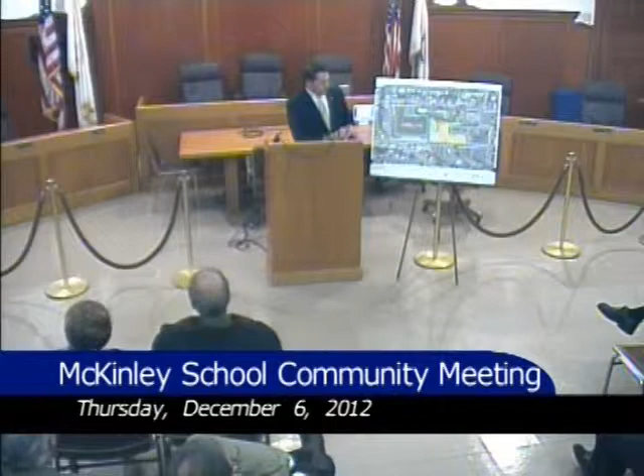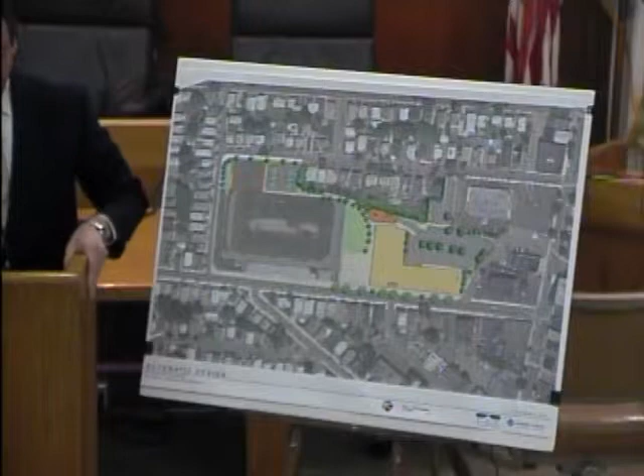The building as it's planned right now — when we started looking at this, we looked at it up to the wall of the existing track stadium complex, saying that would be the site for the new school. But as we started looking at the Hill Park site, the city, the building committee, Mayor Rizzo, and Superintendent Dakin urged us to keep sight of this issue about the football field.

And we continued to look at the high school site for a potential location for the stadium. We started looking to see if we could possibly allow enough room for the new stadium so that when renovations happen to Del Russo Stadium, we could elongate it to get a full regulation track around, which is going to fit right into this spot.

So when we started planning, we had up to this line, but we realized there was real value in allowing that area to stay reserved so the stadium could occupy it in the future — or hopefully even sooner, when Del Russo Stadium is redeveloped. So it's feasible, and it doesn't restrict us too much. We can stay on 3 stories.

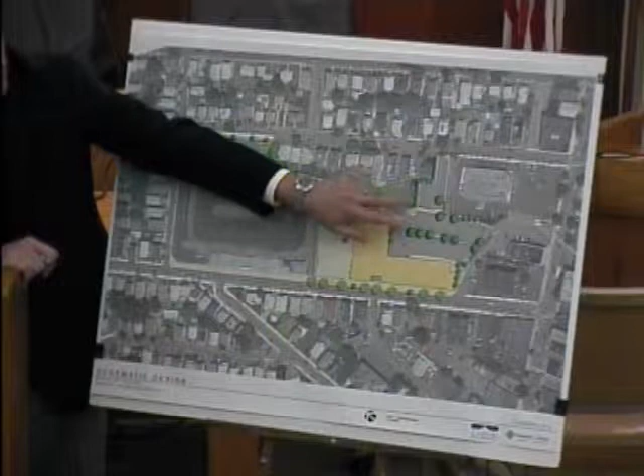This is the 3-story structure. It's based on, as you can see, an L scheme. There are major entrances into the building at this point, as well as at this point on Park Avenue. There's about 60 parking spaces on the site proper, and about another 15 spaces in this area back here, which I'll talk about in just a second.

As you know, there are existing tennis courts and basketball courts currently in this location. This proposal suggests that ultimately, when the whole complex is built out, the area back here in the northwest corner of the site would become the home of the new basketball and tennis courts, which could also serve as a future hard surface playscape for the kids from the school.

There's also a playground, a tot lot here at the north side of the building, with play structures appropriate for pre-kindergarten, kindergarten, and first grade children. Until the stadium is built out, this area will serve as both a hard surface playscape and a grassy area, which will be a nice, suitable playground for the children.

The older kids can possibly go back and use the courts. Once this field is built out, the recreational resources on the site will rely on the tot lot, this hard surface play area, and there will be a small plaza just to the west side of the building along this edge.

The circulation in and out of the — well, let me talk about this a little bit. This plan does assume some additional property acquisitions adjacent to the site. As I mentioned before, the original site that we planned on went up to the existing wall of the stadium. By allowing that area to remain undeveloped, with either building or parking,

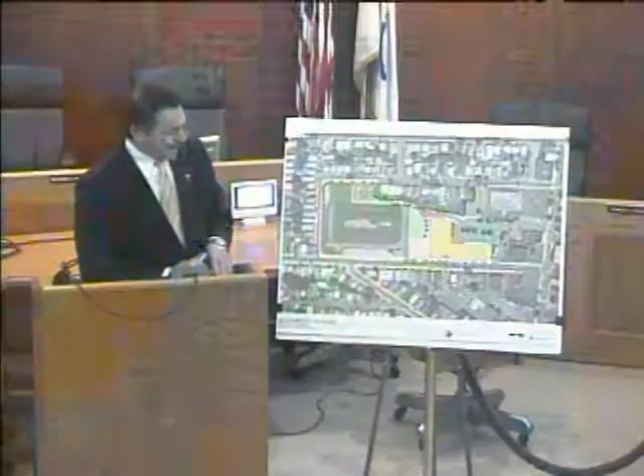it chokes us a little bit in regards to the parking that's available on the site. It doesn't get us to the number of parking spaces we would need to accommodate all of the faculty and visitors we would have on a daily basis. And it also restricts the amount of traffic flow on the site, making it very dense for drop-off and pickup times.

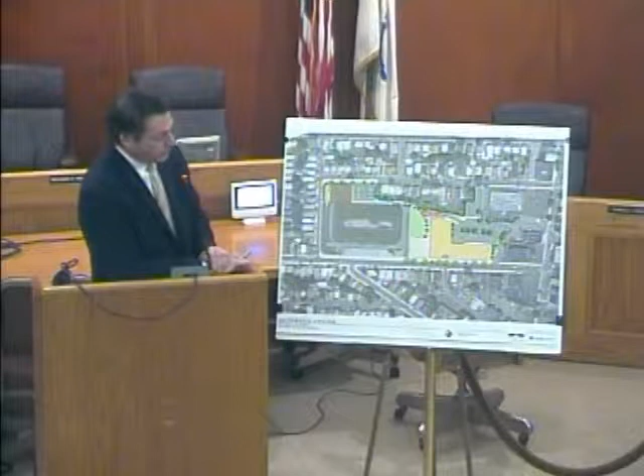If we don't acquire some additional property back there for driveway space, drop-off edge, and parking, the net result is going to be more overflow onto Park Avenue and onto Fernwood. So when we looked at that, we felt this was something we wanted to put forth to the city as an option.

It would require the acquisition of 3 properties along Fernwood Place. It would allow for that street to be opened up wider so it could become a 2-way street, providing both ingress and egress from the site, and also that very critical additional parking space and drop-off edge that we need.

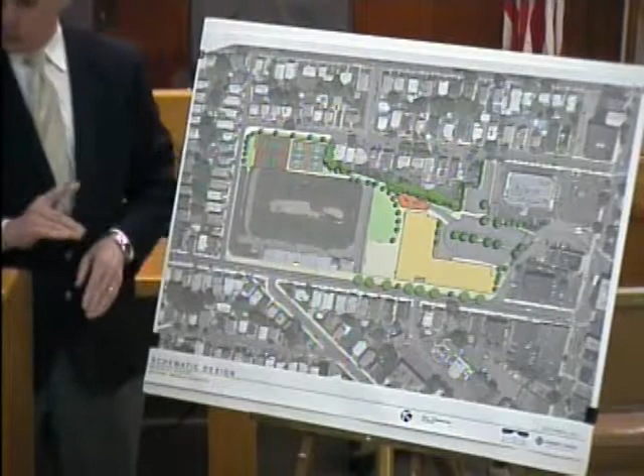So the traffic patterns primarily on the site are like this. From Fernwood Place, our primary access - most of the students, and maybe Dr. Dakin can help me out with this, most are from the south area, south of the building.

So most people are coming north to get to the site. The primary access is up Broadway, up Fernwood, into the site. That's one. Secondly, up Broadway, up Park, into the site. And a third that will probably emerge, not necessarily our plan, but something that's probably going to happen - people coming down Foster, turning left onto Park and dropping off along this edge, probably overlapping the stadium a little bit.

Now those kids will walk along this sidewalk, which is very wide, and there's a major entrance into this building. There's a lot we'll have to continue to discuss in terms of traffic safety - where to put patrolmen, crossing guards, crosswalks. But we see this as a major junction and a major drop-off edge here.

Which helps with reducing the amount of cars coming onto the site. So regarding these 2 traffic patterns, if you come in here from Fernwood, you can drop off right here, turn around, come right back out to Fernwood - we would propose to make this a 2-way up to this point. So when you discharge from the site, you can either go back toward Broadway or left onto Fernwood.

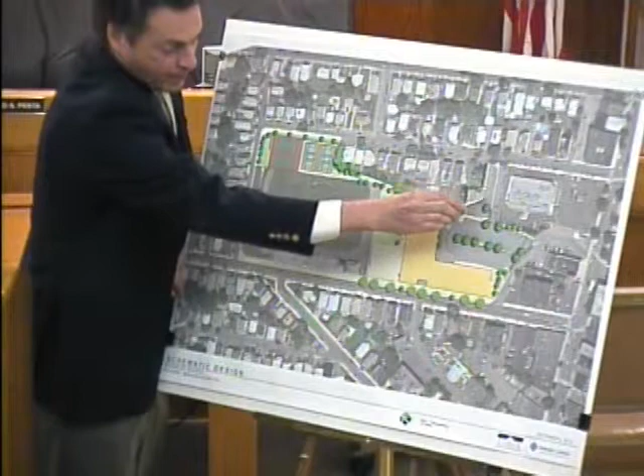You could also come in this way, loop around the island. All of this here is drop-off edge, but say you have a pre-kindergarten student you want to hand right off to the principal - you would come right around to the front, drop off right along this edge, then come through the site.

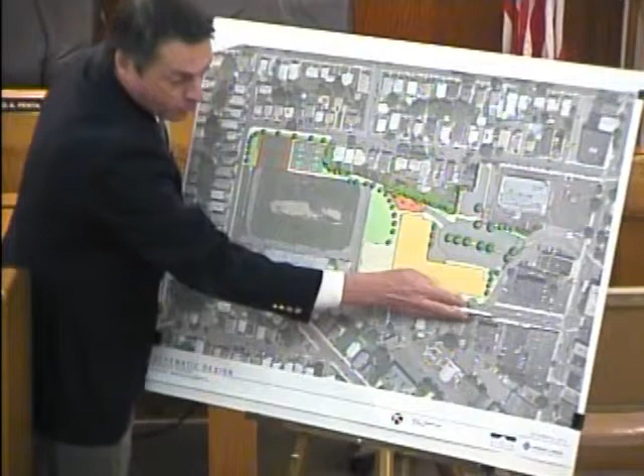You can either come out to Park - it'll be right turn only onto Park because this queues up quite a bit in the morning here, discharging onto Broadway - or you can loop around here and come back out Fernwood. So that'll be the primary traffic patterns from Fernwood.

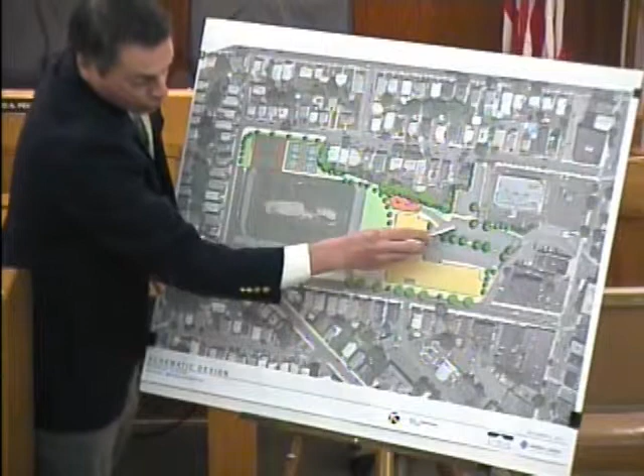And from Park, if you come onto the site from Park, you would most likely come right around the loop, engage with the main drop-off plaza right here, come back out, and you can either come out Park or come back out Fernwood.

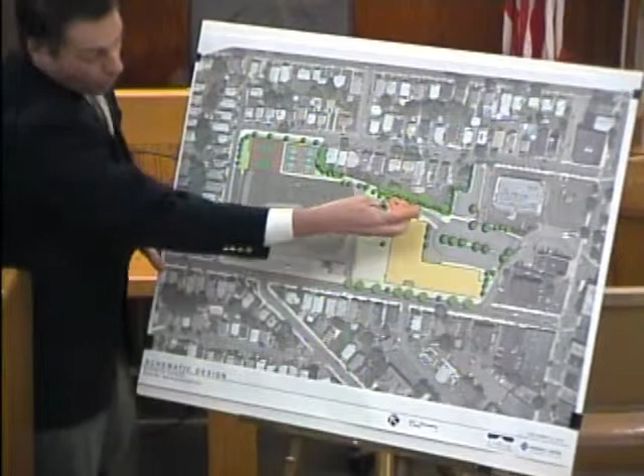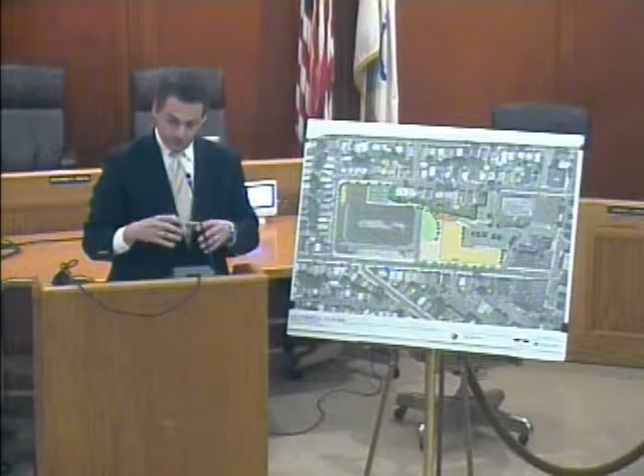As I mentioned, all the kids being dropped off will come right along this plaza area, into the main plaza and main entrance. There's also a main entrance here from Park. They all come into a common lobby where the administration office is, and I'll show you that on the plan in just a minute. So there's very good supervision and surveillance of both entry points into the building from that one vantage point of the office.

The only other thing I wanted to point out on the site plan was that this back here is the service area, where we'll be receiving shipments. The dumpster will be back there. There'll be a generator and a transformer, all of which will be screened. We'll put some sort of an acoustical enclosure around the generator.

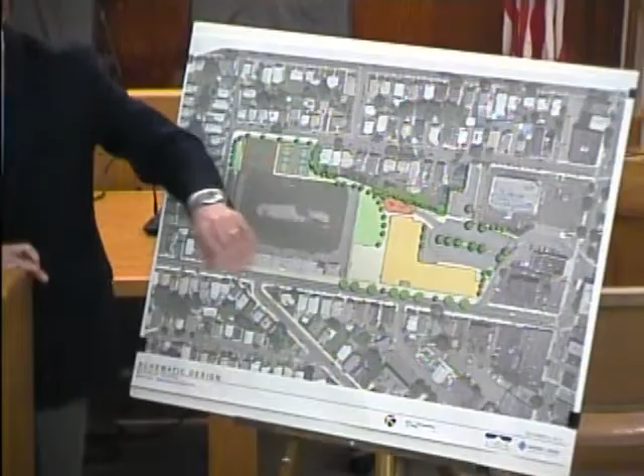Did I cover everything on the site plan? I'd like to come back with any questions or comments on the site plan. I'd like to see if we could advance to the floor plans.

I'm just going to run through them real quick. I won't get into the detail of where all the IDF closets are and the mop sinks and all that, but just give you a general idea how the building's organized. We think it's working pretty well.

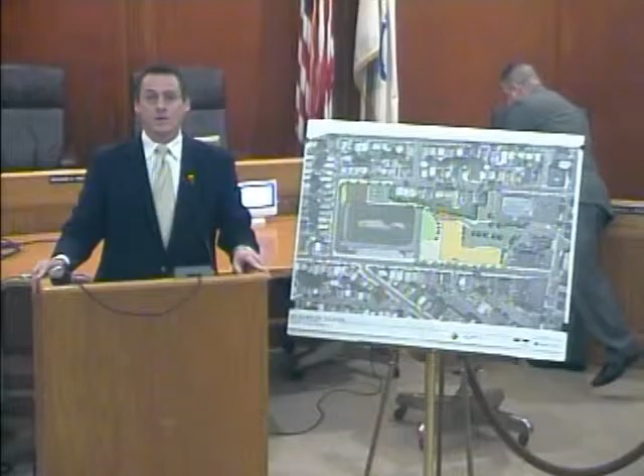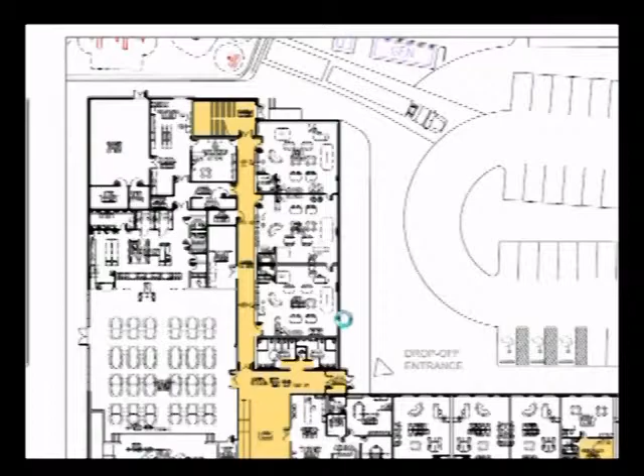And just pan up a little bit on that, Jim, if you can. So if you enter in at the main entrance there, you come into a very generous lobby with the administration area on your left-hand side. That's the second floor.

Okay, so here we are back at the first floor. So when you enter in at the main lobby, the larger yellow area in the center of the plan, straight ahead of you is the cafeteria. There's lots of glass looking into the cafeteria, looking out into the fields.

Basically organized around the cafeteria to the north, we have our shipping and receiving area, boiler room. To the right-hand side of that north wing are the 3 pre-kindergarten classrooms. Very nice location for those. They're right next to the drop-off area. We could possibly have doors that open right into those so that the teacher could actually go out and engage with the parents as they're dropping off the children.

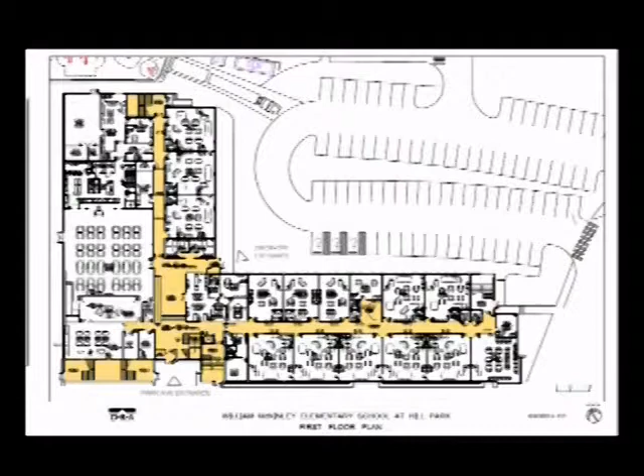The administration area is right in the center of that plan, adjacent to the lobby and adjacent to both entrances from the interior of the site and Park Avenue. And then the whole wing to the right there on the plan are all of our kindergarten and first grade classrooms on the first floor. There's major stair towers at either end of that, and there's also a major stair tower to the bottom left-hand corner of the plan, which is the main discharge from the gymnasium, which is on the second floor.

Let's advance to the second floor plan, Jim. The gymnasium, this is kind of a key component of our strategy for this site, is to reduce the building footprint on the site. We wanted to stack as much of the program area as we could, and what we did is we found a way that we could put the gymnasium over the cafeteria. It's a little bit of an unorthodox strategy.

We did it at West Revere. It worked great over there. The minor problem with this, but it's not insurmountable, is that you've got to allow for a lot of people in that gymnasium to find a way down to the ground in the event of an emergency, and that's why we introduced that large stair directly to the bottom left-hand corner of the gymnasium.

It's intended that both the gym and the cafeteria on the first and second floors have a lot of glass in them so that from the lobby space and from the corridors you can see into those spaces as well as see out into what hopefully will be the new Della Russo Stadium. Give a little bit of soft greenscape to an otherwise urban setting.

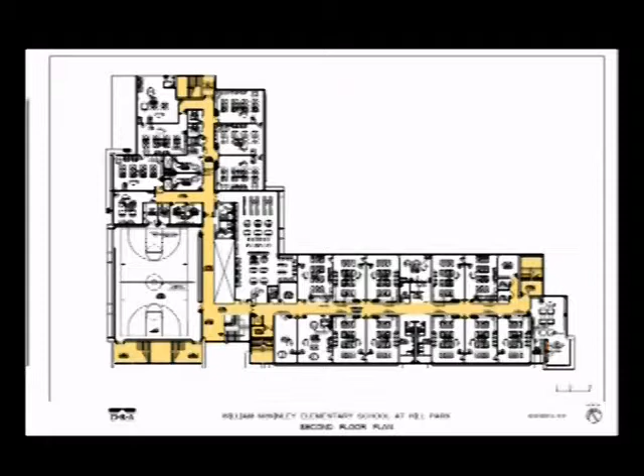Again, most of the other spaces, the only other non-classroom space on the second floor, if you look just to the right-hand side of the gymnasium, on that inside corner in the plan, is the media center library. Again, a lot of glass, very transparent, very open, has a very prominent position in the plan. As you come into the building, into the main entrance, you're looking up through the glass into the library, nice fixtures, kids sitting in soft seating, much like the strategy we employed at the Rumney Marsh Academy.

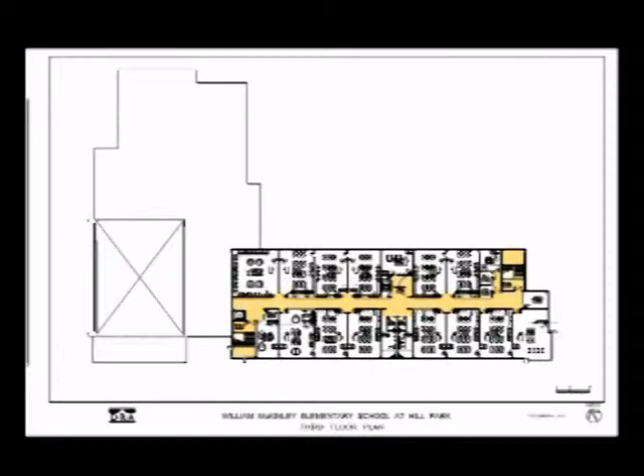Let's just go to the third floor, Jim. So this stacks neatly on the first and second floor. On the third floor, just classrooms. The gymnasium volume, of course, goes all the way up. We can probably go right on to the building elevations.

So this elevation is kind of a two-piece elevation. The one on the bottom connects to the one on the top. And the materials are basically masonry, terracotta, which is a clay masonry type of product that's a rain screen. There's lots of windows and lots of glass around the entry.

So there's a very different feeling between the classroom wing, which has sort of ribbon windows, and the terracotta, to the gymnasium volume, which you see on the bottom left, as well as the entry into the building. Very transparent, a lot of curtain wall, a lot of glass. We'll use sun shading devices and interior light shelves to cut down some of the glare. We'll specify a particular glass that reduces the amount of solar gain that we have through that exposure.

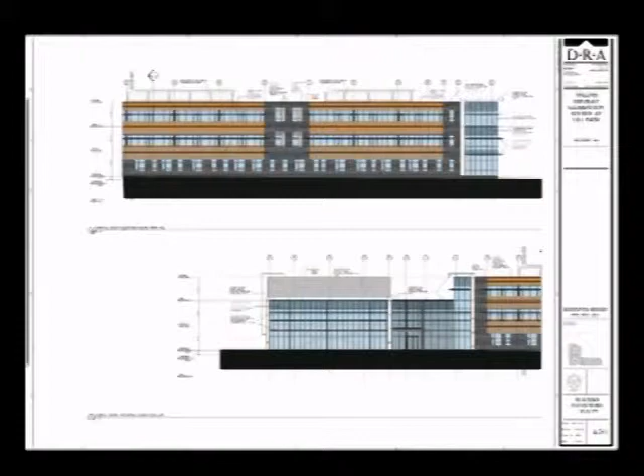We can control those things now with some material strategies. But this openness of these areas is going to do wonderful things for creating terrific monumental spaces, having a real connection between the interior and exterior of the building. Let's go to the next one, Jim.

And this would be the elevation. The one on the top is the elevation looking from the driveway in from Park Avenue. So you see the classroom wing on the left-hand side, and then beyond you see the north wing of the L, as well as the library projection.

Jim, can you use your cursor to point to where the library volume is? That area right there is where the library is. So as I mentioned before, when you're walking into the building, you're looking up and the library is right there over your head. A lot of glass - you can connect right in with the light fixtures and the kids sitting up there. It'll be very dynamic and engaging.

And then the bottom elevation is what you would see from Della Russo Stadium. As we pointed out before, on the bottom you see the glass going into the cafeteria. On the top, surrounded by that white surround of some material, there would be the glass curtain wall of the gymnasium.

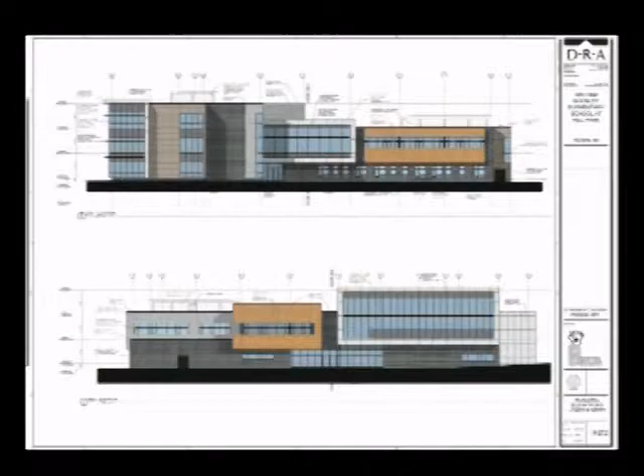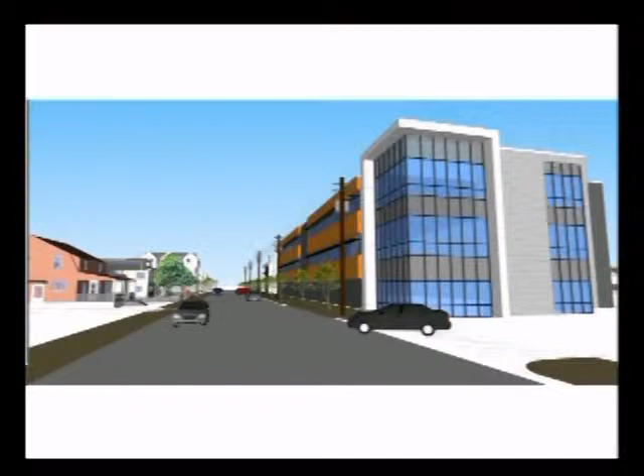What else is in those spaces, Jim? There's an art room on one floor, a computer lab. And then once you pass those specialty spaces, it transitions to a different type of vocabulary with the masonry and the terracotta. Do we have another view there, Jim?

So this one is looking from the - is this the opposite way, Jim? Okay.

So this is what we were describing - one of the major drop-off edges is from this point and back toward the picture plane where kids could be dropped off. They could walk past the gymnasium, the glass of the gymnasium stair, and into that main entrance just beyond the phone pole. That will be probably an equal main entrance to the one on the interior part of the site.

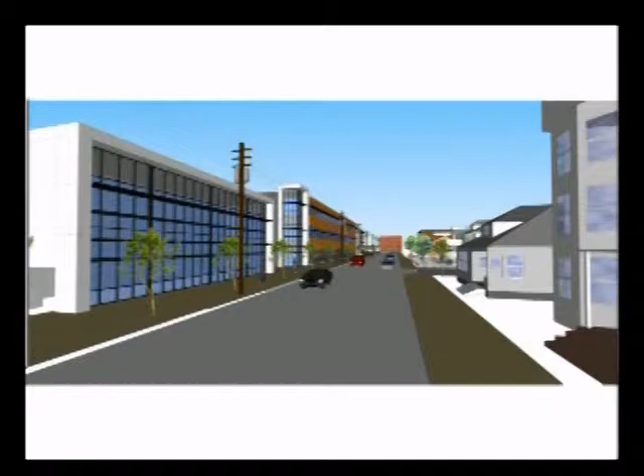And that shows that entry volume again from a slightly more eastern view.

Picture with the McKinley, existing McKinley school in the foreground and the new school in the background. You probably won't see that view very much, but if you're going by on a hang glider, you know, take a shot.

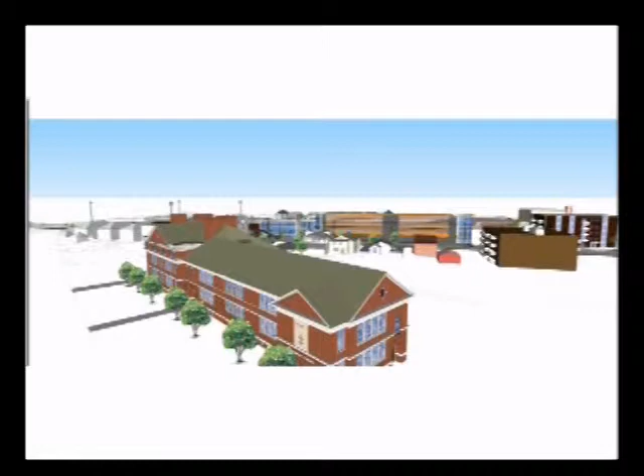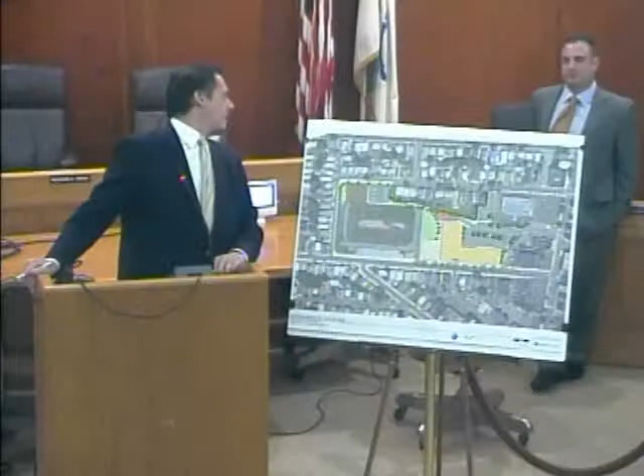So that is kind of an overview. Does anyone think there's anything I've skipped over that we want to touch upon?

The real idea behind these community workshops, or community presentations, is to try to get some input. We're at schematic design. We've established what we think are the best ground rules for going forward with the project, but we've got some of our experts here.

Christine Ketchis from Nitsch Engineering - she's our engineer, our traffic engineer. Doug Morris from Warner Larson - he's our site designer and also very savvy about all of the civil engineering aspects. I've been working with Doug. Doug worked on the West Revere School, the Paul Revere School, and on Rumney Marsh.

Yeah, so we're certainly pretty well equipped to answer any of your questions and hopefully settle any concerns you have in regards to the project. But we're also very interested in hearing input and ways that you think we might be able to make this project better.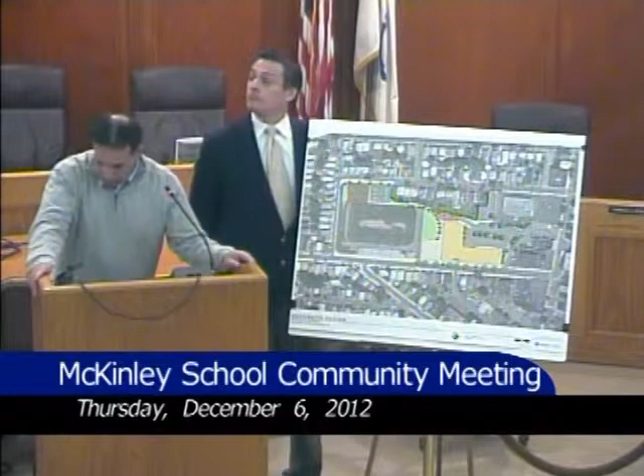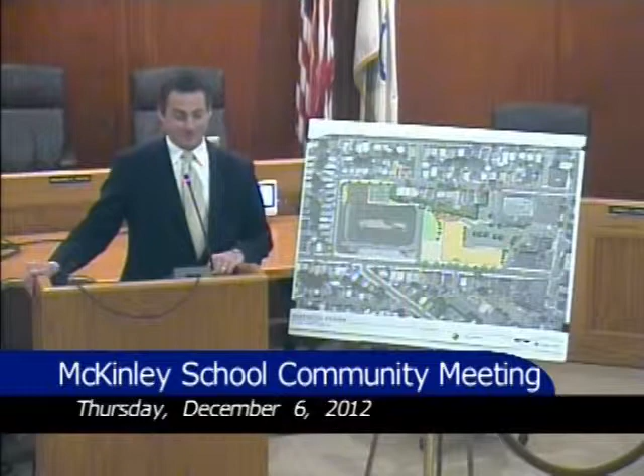Oh, I'm sorry, yeah. I have several. Sure, you mind if I come up? Absolutely.

I'm Councilor Charlie Patch, Ward 6 Councilor.

It's hard, I feel there are questions that have to be asked, and it's hard for me to. I feel that I have to do it, and I have agreed with Superintendent Dakin and Mayor Rizzo on just about everything going on with the school for my 5 years as a councilor. But I've had problems with this right from the start. On August 7th they had a meeting to vote on which option to use.

They gave a sheet out with several options, and I didn't feel at the time — I was the only one that spoke out against the Hill Park site being the option chosen. I grew up in that area. My mother's side, my Sicilian family, immigrated from Sicily and lived on Alston Street, and my Irish grandmother — we grew up as a family on Victoria Street and lived in this area. So it means a lot to me, even though for 40 years I've been living in Ward 6.

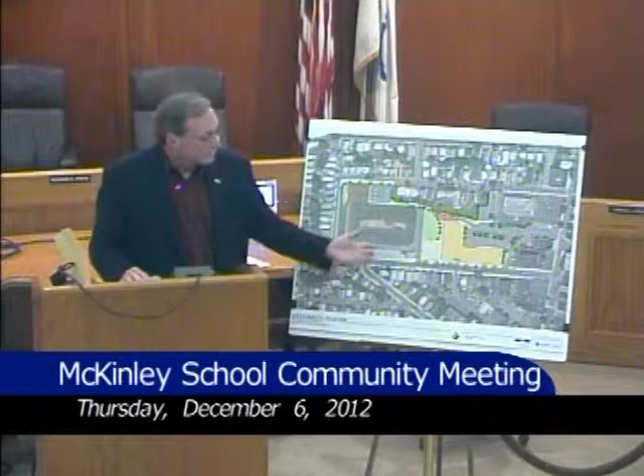We, as a councilor, have to pay the bill. We have to vote on the bill, and I just don't... we don't get no figures. All of a sudden now, they never had at the meeting on August 7th. They had no money to take land. They're talking about taking 3 or 4 houses.

What about in my ward that I represent, St. Mary's Park? They're talking about putting Hill Park down there. It's a swampy land, if anybody's been down there. And they're going to rearrange the ballparks, and how much money is that going to cost? And they're talking about now, the reason they're not building it on the old site is it's going to be an administrative building. Where's that money going to come to refurnish that?

I mean, there's a lot of questions, but we're not getting any answers as far as money. So I don't know how it got to this point where this site's already been picked. When the ballpark, and back at St. Mary's, we don't even own that property.

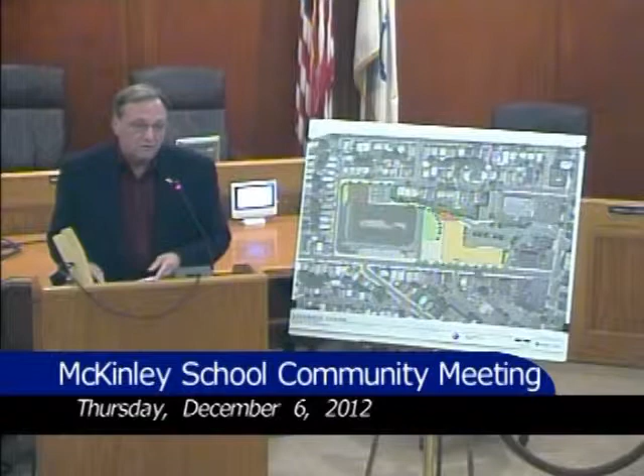Again, there's a lot of questions, but I'm going to support the parents and the kids of the McKinley school. I know you need a school, but I want some answers. I'm going to be the one up there, sitting up there, having to vote to pay the bill. Your money. It's going to be your money. So hopefully, over the next few months, we can get some answers.

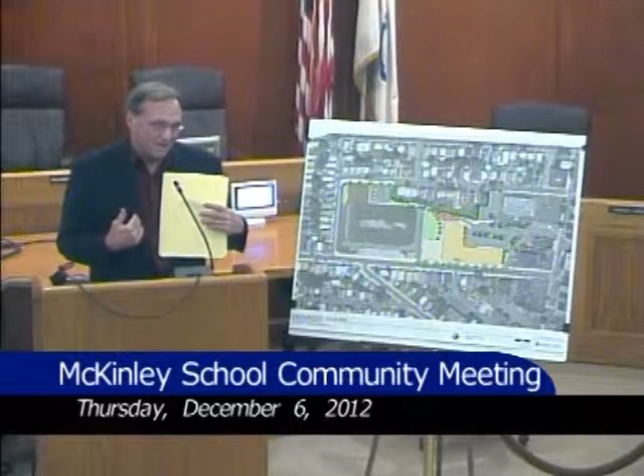And what, I don't know where the young lady is that did the traffic plan, but you have to live here to really know what a nightmare that area is as far as traffic without a school. And it just ain't going to work. But hopefully, if it does develop, maybe I'll be proven wrong. But at least I had my say, and hopefully we can get something worked out here. Thank you.

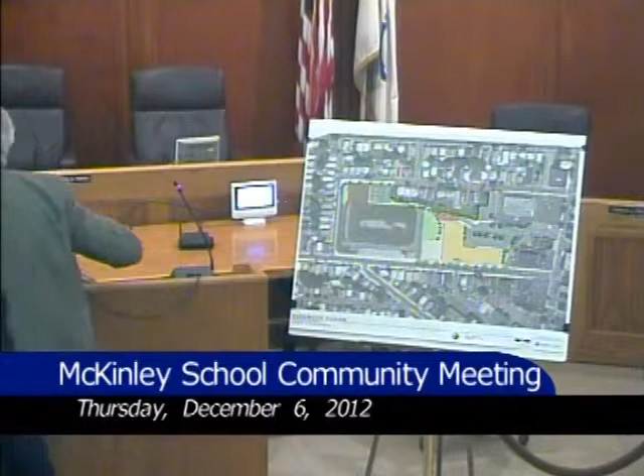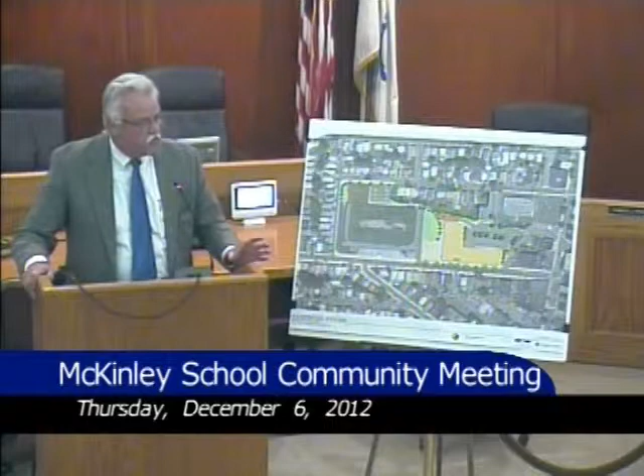I got a couple of comments for him. First of all, I want everybody to understand something. This is not an ideal situation. It never would be, never could be. By the way, I'm Ward 4 City Councilor Steve Reardon. We were up against significant roadblocks finding a site for this school. I would remind Councilor Patch that it came down to 5 separate options, 3 of which were the actual McKinley site.

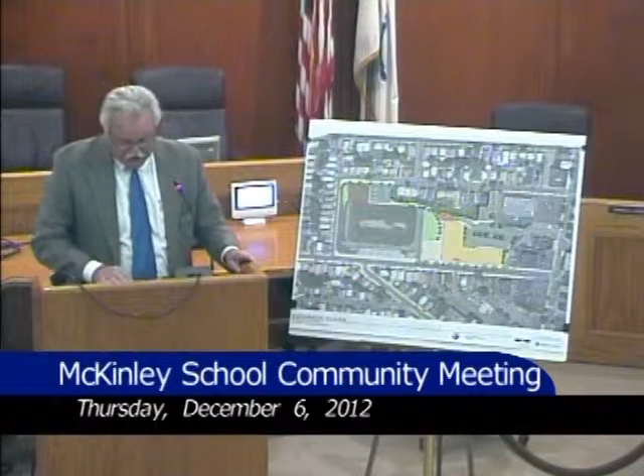He's talking about no figures. Well, frankly, we have figures, and the figures have been published and known to everybody. Option A was rebuilding the school. Let's start with option B: renovation and addition of the school as it stands. That option was determined to cost about $43.1 million with an estimated share of Revere of $11.6 million. Now, no one knows what it's going to cost dollar for dollar, but these estimates have been there since at least this summer.

New construction on the existing McKinley site, in addition to being a huge issue with finding space and disrupting the entire school system, the figures are there. Option C was $40.9 million with an estimated Revere share of $11.9 million. That is the estimate. It's not a number we can put our fingers on absolutely, but it's a good faith estimate that these people, who have worked well over a year now into this system, have come up with.

Option D, $45.6 million, Revere share $14.3 million. These are the estimated costs. The new McKinley School has an estimated cost of $41.7 million with Revere share at $9.6 million. This is what Dr. Dakin was referring to at the beginning. These figures have been developed. We don't know specifically what it's going to cost, and we won't until the final bill is in.

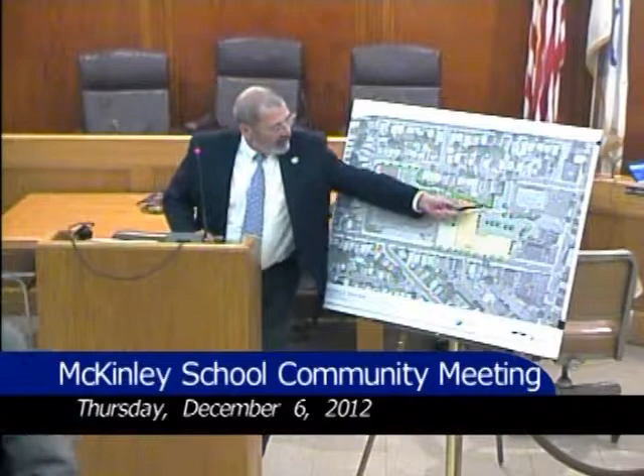These properties are the properties that are in the area. It's better for us to walk the kids, no problem with the traffic. I live across the street as well, so.

What is the problem? Well, to address the issue of the folks that are here, you're in the properties that we're proposing to take because it's understood how difficult it would be on you, and add to that, it makes the project happening better. So in essence, in my opinion, it's a win-win.

You don't want to live next to a school, even if it was a one-way in, which we would have to do. I think the chief would mandate we have to come through. There's no way on God's green earth people could get out. Mario and his wife could not get out of their house. No, there could not be two ways. It could not be two ways.

But understand, the plan we're presenting is in harmony with what you're thinking. We take the houses. I mean, unfortunately, you know how I feel—I wasn't even answered when I walked to my own councilman. I had to show up at your door to get any kind of an answer. And I gave you as best I could.

And what we will do—because it's beyond the jurisdiction of me as superintendent or me as chair of the building committee to talk about the purchasing of the lands—what I will do is make sure and talk to the mayor that he gets a meeting with you folks specifically about the property acquisition suggestion. And that will give you an audience with the person that can answer that question for you, because I can't answer it. It's not in my purview as building chair to answer it. But I promise you I'll get you access to those answers, okay?

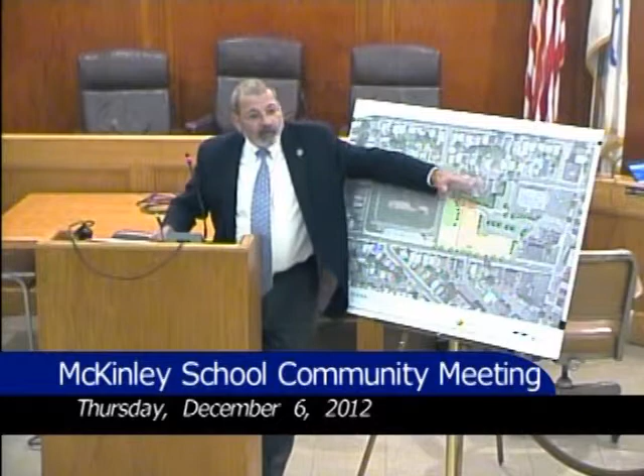No, I think the intention of the councilor was that if this plan all came into being, namely with the taking of those three properties there on Fernwood Place, that it would enhance the others. I think that was the intention of his comment. I can't speak for him, but I think that was the intention.

Well, because this is exactly what that forum is for, and the communication out—again, the building committee can only make recommendations. It's up to the city whether they want to go down that route. So we've been pushing, I've been mentioning Fernwood Place and Fernwood Ave for a long time, but without the jurisdiction to make those decisions, any conversation that I would have would have been out of my authority as building chair. But I will promise you I'll get that audience.

If I can go back to Mr. Patch, the bottom line is $4 million. If the estimates had a $42 million building and the others were 46 and 52, and it ends up being that the building is 44, the other one would have been 48 and 54. So there's about a $4 million swing, and as time goes on, that building cost naturally gets inflated and goes up. I wouldn't be surprised if it goes up. But if it goes up for the cost of building it on Hill Park, it would have gone up for the cost of building it on the existing site proportionately, or the other site.

So we took with best knowledge what we knew as the cheapest possible plan. Yes, traffic is brutal. Yes, traffic will be brutal. And I would suggest that if we ever could have put it on the McKinley, although we can't because it's more money, that the intersection in front of City Hall would have been brutal. So brutal is there when we're going to move 690 kids into the school rather than, how many do you have now, Mr. Mosher? 470.

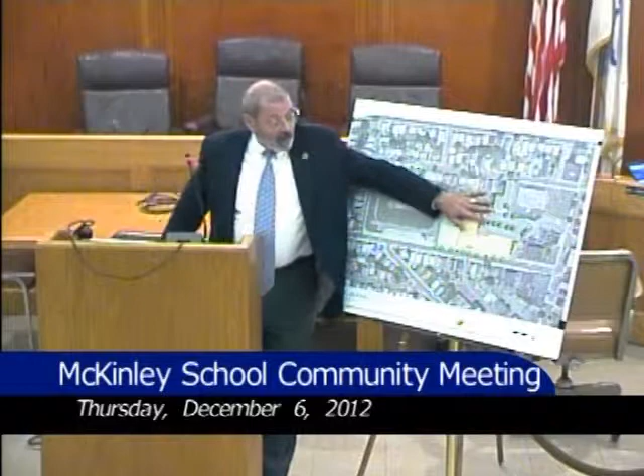The strategy here runs deep, and the thought runs deep. I understand your point, and we'll try to get to that. But why don't we see if there's anyone else? Question on any other point or comment?

Councilor: On the traffic study, I'd like a copy of it. Was it done in consultation with Revere Police or with our traffic division? We'll let the traffic people answer that.

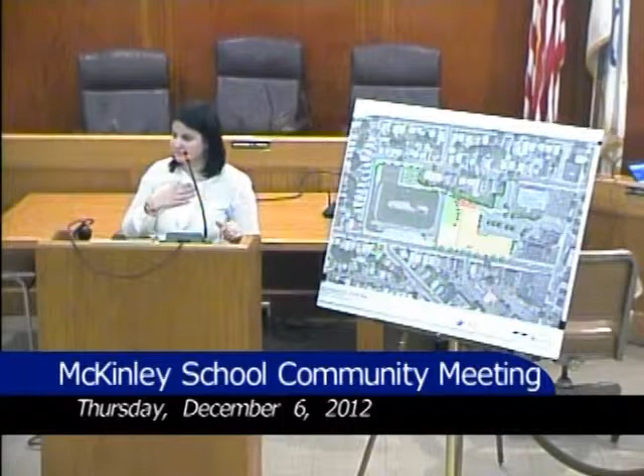Hi, Christine Ketches with Nitsch Engineering. I did the traffic study. I did meet with the police department, I believe with the safety officer, and had about a half-hour discussion with him about his thoughts on the school. He said it absolutely is a traffic issue. His big suggestion was to turn Foster or Yeamans into a one-way in the other direction to alleviate that congestion. This also touches on the point about Broadway.

I don't live in Revere, and I've been told by many people that if I did, I'd truly understand. But I have driven through here in rush hour a few times on my trips to the site, and it is a mess. I think one of our goals by doing the one-way out onto Park and trying to get most people to enter the site from Fernwood is to alleviate those left-hand turns you'd normally anticipate at Park. So we're trying to do everything we can to get it off of Broadway and off those pinch points on Broadway to kind of disperse everything.

Another question I have is on MBTA buses. I know that left turn onto Park - has there been any thought of working with the MBTA to figure out a way around that? Because even now, with a very newly popular restaurant on the corner, seeing buses take that left turn gets a little hairy. I've seen them make that left-hand turn. We have 700 kids coming out of school, and you have a bus taking that left turn.

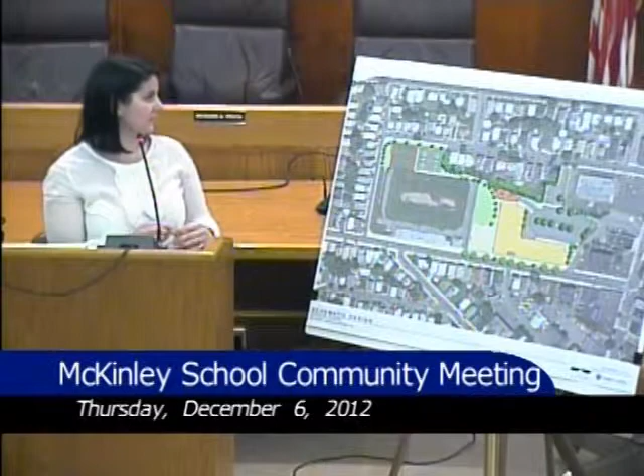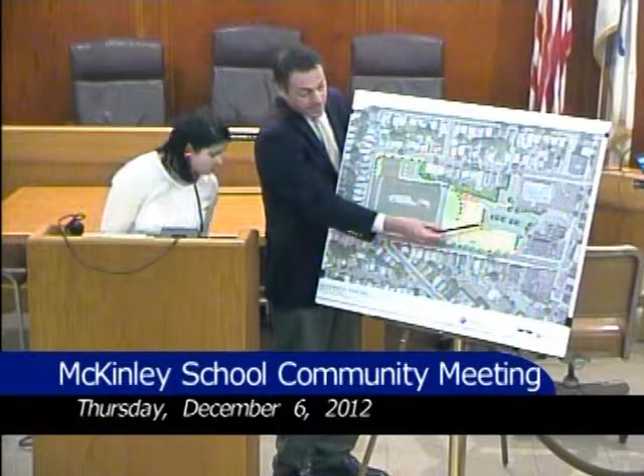Don't go too far, because I think it's partially a traffic issue too. If we don't acquire these properties - and if you even go so far as to keep this closed off and not address it at all, not even have a driveway in or out - you'd be taking 100% of your traffic in this way. First of all, you're about 20 parking spaces too short based on what we planned the capacity to be. Secondly, it's a huge burden on this intersection and on this single route to have all that traffic coming in here, contending with specialists coming into the school, teachers coming in and out, and parents dropping off.

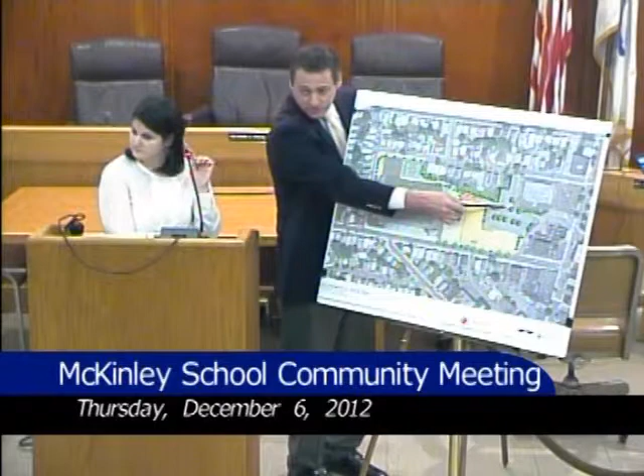By having this additional connection back here, the nicest feature is having this quick drop-off turnaround right here, where those cars don't even have to enter into the site. So it's both parking and site circulation on a day-to-day basis.

How about utilizing some of the staff and teachers to park at the original McKinley School right around the corner? If the existing McKinley School is going to be serving some other use, there's very little parking available, only 15 legal parking spaces. I know right now you park a lot more out back there, but you're parking 4 deep.

Given that that's going to be 45,000 to 50,000 square feet of some sort of office space or other use, it's certainly going to need at least that much parking. If it was converted to administrative offices and the superintendent's office, they would need every bit of that existing parking space plus some to accommodate their new use.

Just one other comment about Fernwood Place. It's really the most direct route for people to get back onto Broadway going southbound. I have a map of the streets that McKinley School services, and the bulk of them are to the south, meaning most trips come from and go back south of the school. If there's not that Fernwood Place exit onto Broadway, 100% of the vehicles will be coming out onto Park Ave and taking a right. And if they can't go down Foster and can't go down Yeamans, you're going all over Revere to get back to Broadway.

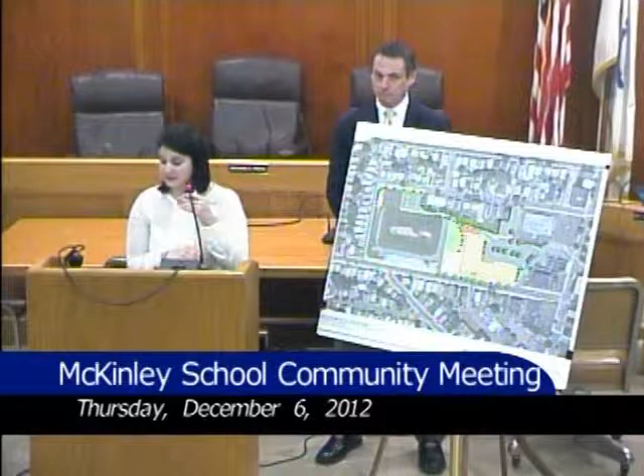It's in the report. Actually, we do everything by peak hour, but this is over the entire course of dropping off and picking up, which is about an hour and a half. It was 160 parents in the morning and 27 faculty in that time. A lot of the faculty gets there before the peak, and in the afternoon it was 133 parent trips in and out, plus some faculty as well.

Okay, next. Any other topic before we close down?

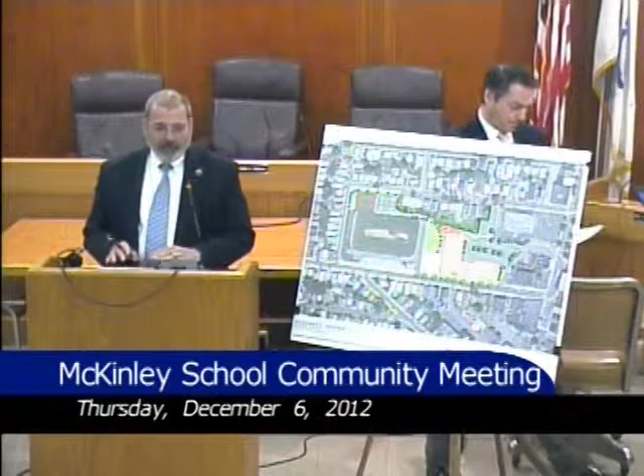So I have a few takeaways from here. I'm going to be getting some traffic reports for the folks that requested them, and I'm going to be approaching the mayor for the residents of Fernwood Place, trying to get you in there as soon as his schedule allows.

We have some takeaways in the form of, I'm getting a strong feeling that you're going to have a miserable life if you're still living there. So take my house. Am I concluding that that's the message I should be taking away? Yeah, okay, all right, from all three of the houses.

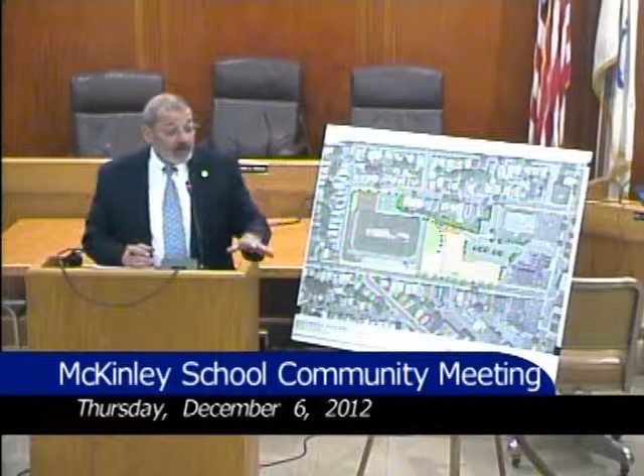And it actually enhances that decision. The building committee only makes recommendations on these things. The councilors here now, hearing you, along with the mayor, that's their domain. We can study and be strategic about the way we plan things, which we've been doing, and the way we present them. If you have any questions, you've been to my office, just get me again if you need it. Everybody else, thank you for being here.